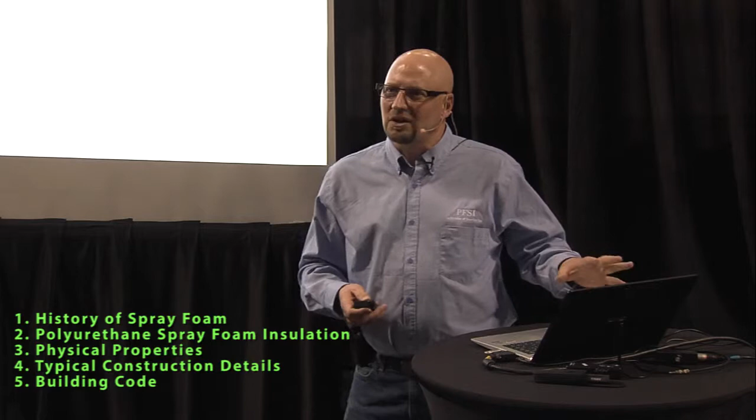We're going to talk about designing an efficient, durable building envelope, basically about spray foam insulation and how it fits within the industry. We'll talk about the history of spray foam, its origins, where it came from, how it came about within the industry. We're going to talk about physical properties, typical building construction details, and a little bit on building code, since there's constantly changes within the code.

The history of spray polyurethane foam: it was first invented in 1939. You guys know Bayer aspirin, everyone's taken a couple on a Sunday morning. Dr. Bayer invented spray foam, first invented in 1939.

The very first use for spray foam in any form of construction was during the war. The Allies would fly over Germany and bomb the runways. The Germans would put foam in the craters, paint it gray, and when the Allies flew over they'd think they'd completely missed their targets because the runways looked perfect. They weren't serviceable, but they looked good from the air. It was a bit of a deception, and a great tactic—one of the very first uses of spray foam in construction as we know it today.

The very first time spray foam was used in construction was 1968, when it was first adopted into the National Building Code and used within building construction. That's over 46 years that we've seen it in the industry, now accepted and governed by the CAN ULC S705.1, which is the construction manual for spray foam.

There's a couple of different regulations that govern spray foam. We want an envelope design very much like a freezer—we'd like to keep the warm air in our house and the cold out, and in summer we want the opposite. So house construction now has been designed very much like a freezer.

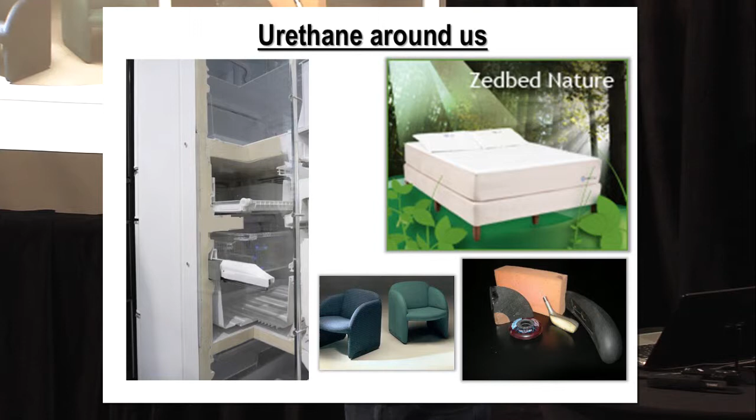We have urethane in everything around us throughout our day-to-day. Those seats you're sitting on have urethane foam in them. We see it in golf clubs—the heads of your golf club are filled with an injected urethane foam to weight and balance them. Car parts, dashes, 90% of our car interior is urethane foam. All the different types of beds on the market are a form of urethane foam, to different degrees. So we see that in our everyday life.

We're going to talk a little bit about foam and construction—sprayed applied foam and injected foams. Spray applied foam is exactly what it says: you have a spray gun and they spray the foam into the building cavity or wall assembly. Injected foams are injected, as we'd see in steel core doors, garage doors, some of the newer polyurethane window frames, and some aluminum frames. So that's where you see all that.

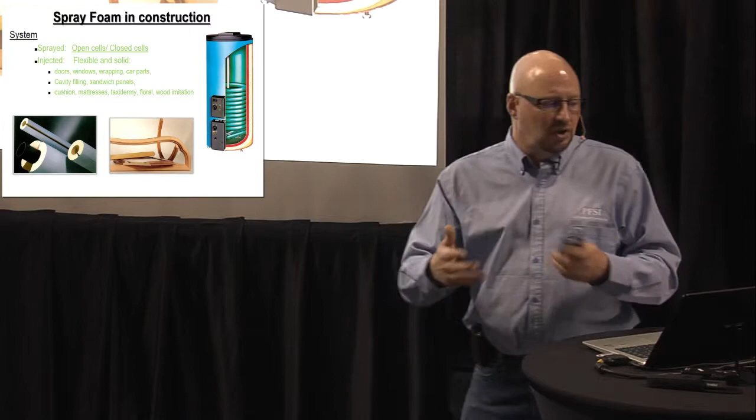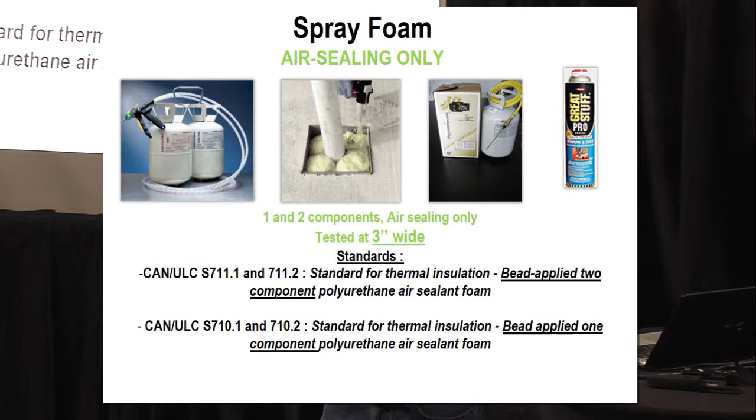Foam for air sealing only—we've all gone to Home Depot, bought a can of that great stuff you spray around windows and doors. That's an air seal, not an insulation; it's for air sealing around windows and doors. They're governed under the CAN ULC S711.2, so there's rules that govern how that foam is used. They can be a two-part component or a single component—single component is just a spray can.

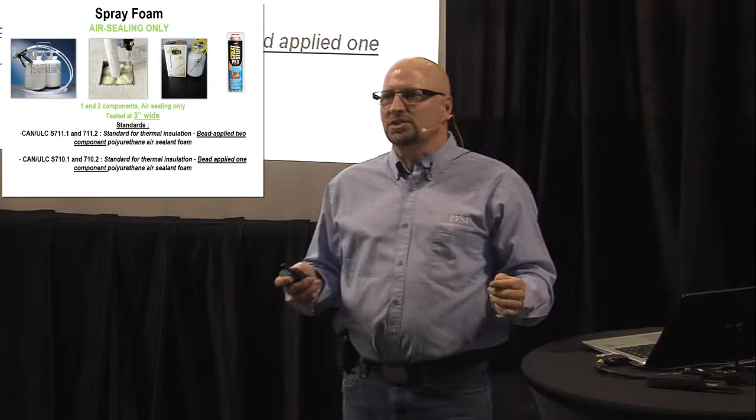You would spray it, it would rise, and you'd fill in around your window. A two-part would be like the propane cylinders you see there, A and B, mixed and sprayed around the windows. That would be more what a contractor would use. Again, they're only for a bead applied around windows and doors. They're not an insulation, they're an air seal. It's just to keep them separated, because people always say, well, I'm going to insulate around my windows. Well, you're not really insulating, you're stopping air seal.

So one of the foams on the market today is a low density foam. Low density foam would be considered a half-pound foam, or low density is exactly what it is. So it's very porous, it's soft to the touch, you can touch it. A very low R value, 3.8 per inch would be the R value of this spray foam. So it's got a lower R value.

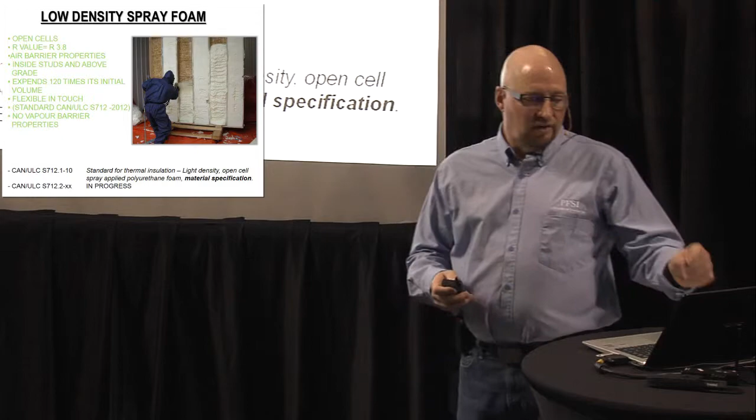The foam can only be used in a wall cavity, indoors and above grade. So it's not for outdoor use, it's not for below grade, is how it was designed to be used. It expands 120 times in the cavity, so they would spray it in, it would fill the cavity, and they just cut off any extra. Again, our 3.8 per inch is governed by the CAN/ULC-S712, the same as the air seals. They fall under the same categories.

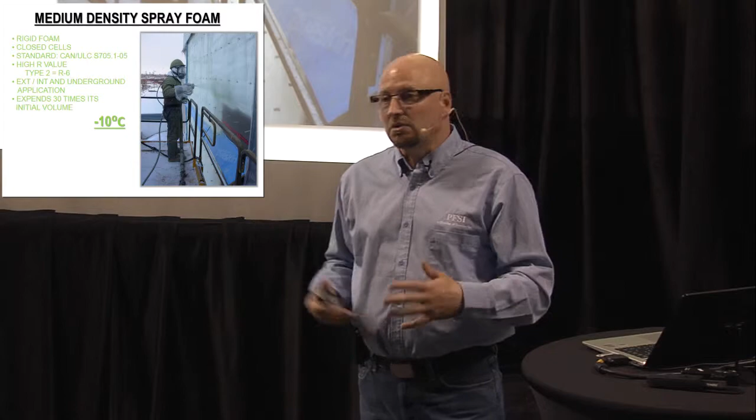Then we'll talk about medium density spray foam, or 2-pound foam as you would hear it. Medium density foam is a 2-component foam, an A and B mixed together. It's rigid with closed cells. Now it has one of the highest R values in the industry, an R6 per inch. So for every inch of foam, R6. It's rigid, it fills the cavity, makes for a great insulation. Expands 30 times its volume, and it can be sprayed at temperatures between -10 and +40. So in the climate of Canada, it makes it very usable within the industry.

High density spray foam would be a 3-pound or better. So we see 3-pound foams used in industrial applications, industrial roofing. We'll see 5-pound foams used in different applications. And in the oil field, we'll see 10-pound foam used for pillow blocking for oil pipes. So there's quite a wide variety of poundages in foams, and they all fit within a scale, from residential, commercial, industrial. So we see that throughout everything - roofing, water tanks, water storage systems.

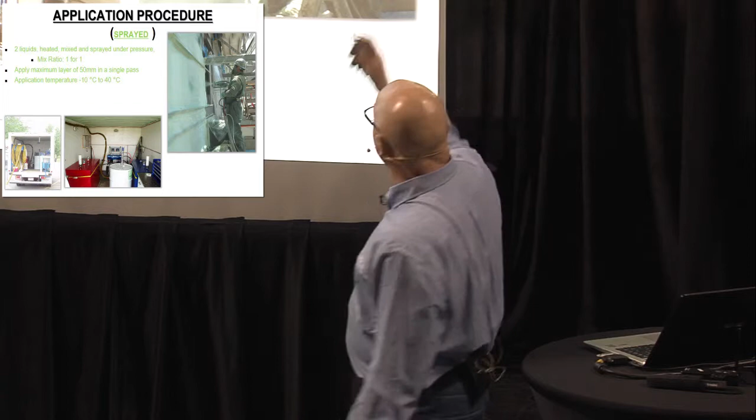Application procedure: spray foam is exactly what it says, spray applied. It's 2 components, an A and a B. They're mixed at a gun through a reactor proportioner, and then it's sprayed on. They have to have specific temperatures to apply it, so maximum thickness is 50 millimeters that they would apply, and temperature application again between -10 and +40. On the right-hand side of your screen, this would be an applicator applying spray foam to a building, and the center picture would be the inside of one of their spray rigs. So very portable, easy to use.

Some of the added values to spray foam that we see in the industry with our product is renewable products. We use soybeans to help cut down on use of petroleum products. We have recycled content, so 18% post-consumption and post-industrial - a lot of plastic bottles are used in recycling with our products, and there's some water added into that as well. So we minimize our carbon footprint by making it as green as possible within the industry. We are the only spray foam made in Canada that uses 18% recycled content. So, a Canadian product with recycled content.

Product standards - what makes spray foam a type 1 or a type 2? I'm sure some of you guys have heard that - oh, it's a type 2 spray foam, it's a type 1 spray foam. Well, there's only one type 2 spray foam on the market currently, and that's Polar Foam 7300, made by Demilec and PFSI. So it's a 2-pound foam. To become a type 1 spray foam, you would have to meet 13 physical properties laid out by the NRC, the National Research Council of Canada. They have 13 physical properties that you would have to meet - that's what makes you a type 1 spray foam. When you exceed all 13 physical properties, you become a type 2 spray foam. So Polar Foam is the only type 2 on the market because it exceeds all of the ratings, and it has the highest R value in the industry.

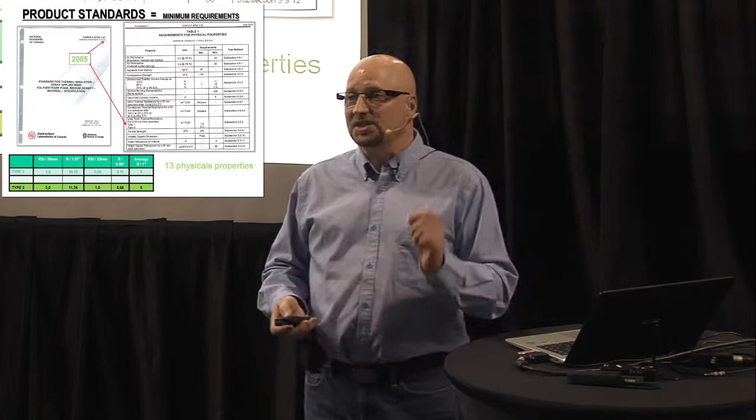The application standards: the National Standard of Canada has CAN/ULC S705.2, which governs how spray foam is applied and installed. The governing body that looks after spray foam is called CUFCA, the Canadian Urethane Foam Contractors Association.

Contractors need to be licensed and registered through CUFCA. They go through an extensive training program, become an apprentice, and then they spray the foam at that point.

A certified medium density closed cell spray foam installer would have a badge like you see here, an ID card with his photograph, telling you when he was certified and what he's certified to spray, whether it's medium density spray foam or half pound spray foam.

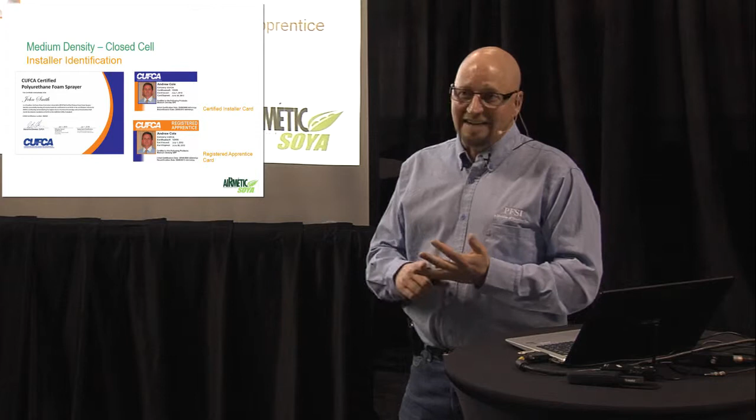As a homeowner, you'd want to ask: are you a certified spray foamer? If he says yes, ask to see his identification - are you CUFCA certified? If he says no, I probably wouldn't use him as a contractor, because that means he's using maybe uncertified foam that's not regulated in Canada. So you'd want to ensure certification.

That's one of the nice things about CUFCA - they do training back east. They're trained extensively, taught building science, the science of the building, how the building is managed. So for medium density closed cell, they do job site documentation.

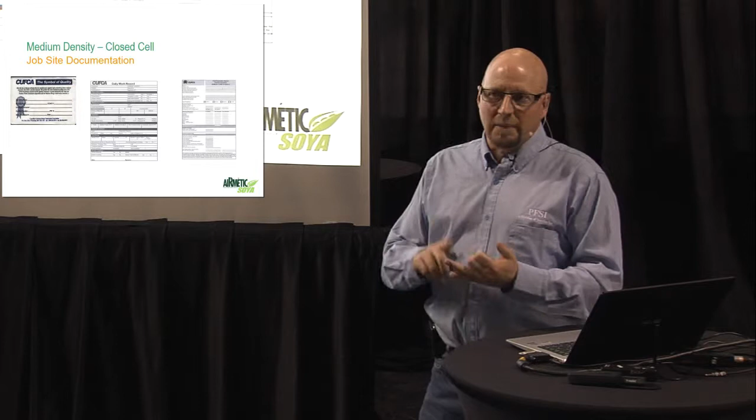On one side of the screen would be a symbol of quality - they stick this on your electrical panel. That would be the CCMC number, the Canadian Construction Materials Centre number for the product, the batch numbers, when it was sprayed, who sprayed it, and their license number.

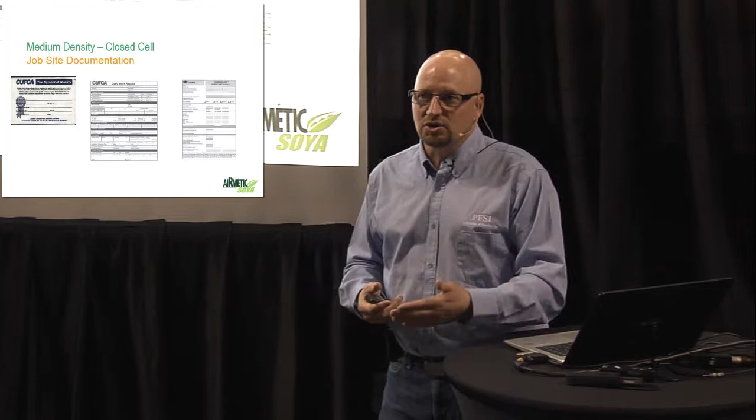So in the future, when you go to sell your home, that adds value. They'll say, yes, it was spray foam insulated by a certified installer - they can always look at that. All the documents are registered with CUFCA.

They would fill in a daily worksheet, marking down the batch numbers, what the ambient air temperature was, what the substrate temperatures were, when they sprayed it, how it performed, and what R value they were achieving. That's all documented and forwarded to CUFCA and kept on file.

So at any time, if you buy a home and it has a CUFCA symbol on it, you can go to CUFCA and say, I purchased this home, here's the installer, could you tell me a little bit of information about it? It validates it and gives you greater value in your home.

And then we have the CUFCA worksheet on the other side. All of our products are manufactured on site - they're an A and a B component, so the contractor in fact becomes a manufacturer. So he would spray about 3 feet, and then test the product to make sure it's performing in the manner it was meant to be performing.

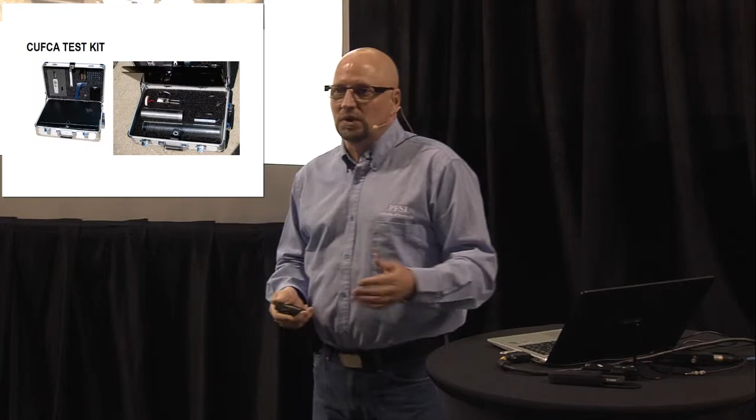He would have a test kit, checking the density of the foam to ensure he's meeting the standards. He would check the adhesion and cohesion to make sure it's sticking to itself and the substrate, and that it's doing what it's designed to do. That's all documented on those worksheets, done usually at the start of the job and at the end of the job to ensure quality assurance.

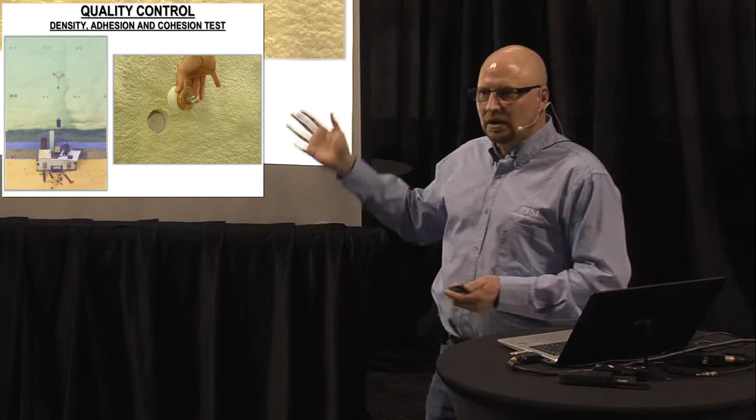In one photo, they've got a weight hanging off the foam, checking the adhesion and cohesion - the product has to stick and be able to hold a 2 kilogram weight. If it pulls off the wall or substrate, it's not adhering correctly, and they would stop and figure out why. That way you get the best quality because it's tested right on site by the contractors, trained specifically for this, whereas an uncertified installer probably wouldn't be doing this type of testing.

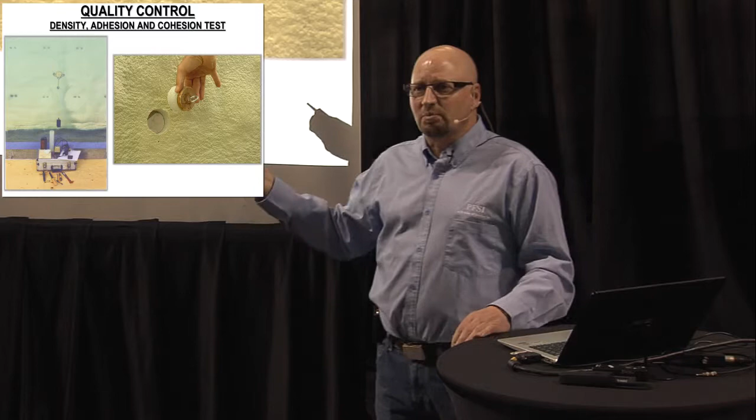And thickness control - so if you've asked the contractor for 3 inches, they would do thickness control as they're spraying, constantly testing it in a grid to ensure you're meeting that standard. So you wouldn't be getting ripped off, so to speak - you know that you asked for 3 inches and you've received 3 inches.

So, properties and functions within the building. As an insulation, it's a type 2 insulation, which is the highest level, and you can achieve an R6 per inch with a type 2 insulation.

As an air barrier, at 25 millimeters, 1 inch, it's 500 times greater than what the National Building Code requires as an air barrier. And as a vapor barrier, it has less than 60 nanograms of perm rating at 38 millimeters, so it acts as a vapor barrier. So you have a vapor barrier, an air barrier, and an insulation all in one. There's no need to have a vapor barrier over the product, so you create a nice seal with that product.

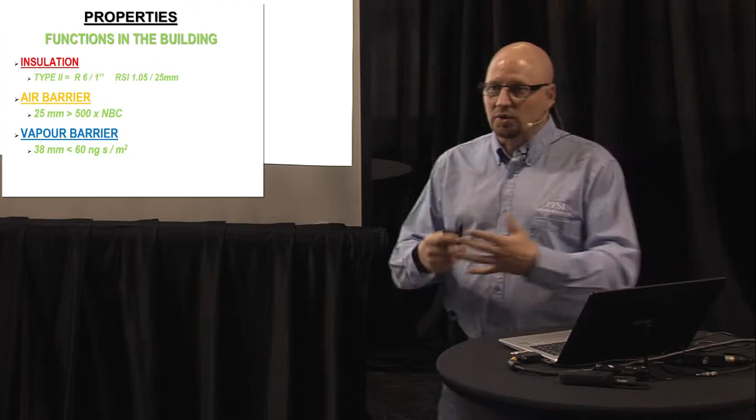Insulation properties: we can see a type 2 insulation. Initially when it's sprayed, it's 7.2 per inch when you first spray it. After 180 days, it becomes R6.6.

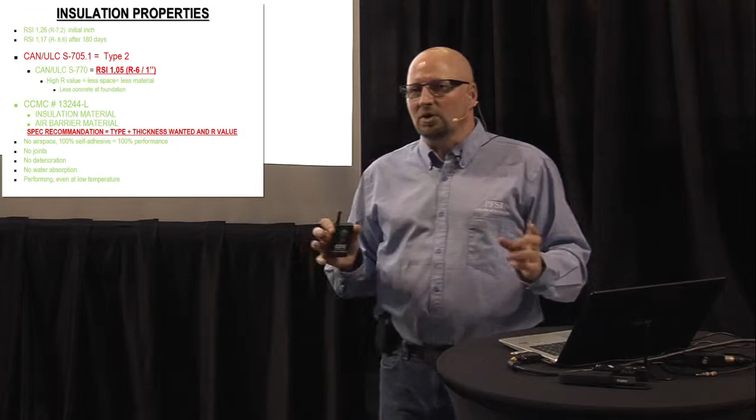But what we're looking for, and because I do these presentations mainly for building officials, architects, and engineers, what they're looking for is the long-term thermal resistance, the life of the foam over its whole life. So they would be asking, what is the LTTR of spray foam? That's the question you'd want to ask a manufacturer: what is the long-term thermal resistance? Our product is an R6, and that's the true insulating value. They can tell you it's R8, R7, R6.9, doesn't matter. It's the LTTR that's the important number to remember, is what is the R value over the life of the building. R6 is the highest in the industry with polar foam.

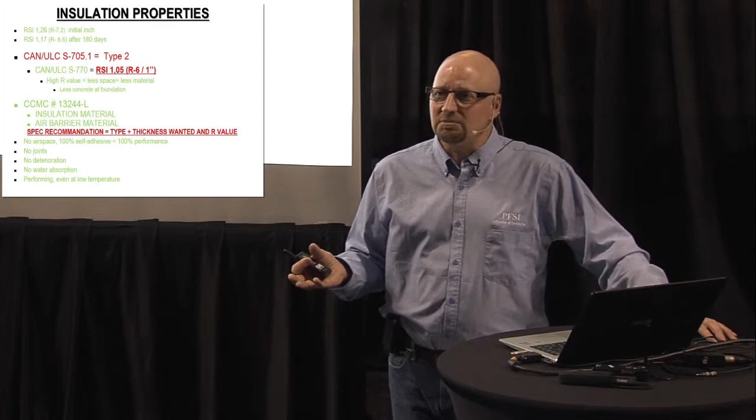And it is a CCMC approved product, so you can see 13244L is our CCMC number. You can go to the National Research Council website at any time, Google it, type in that number, and it will tell you all the specs on that product specifically. So if you happen to have a competitor who says, oh, we're certified, ask them for their CCMC number, put it in there, and you can do direct comparisons to the product.

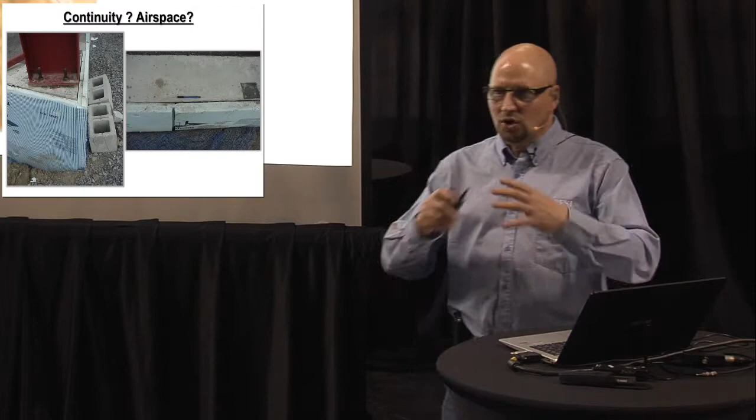Air barrier properties: the National Building Code 2005, parts 5 and 9, require an air barrier system. Gypsum board acts as an air barrier at 0.02. Spray foam is at 0.00004, which is 500 times greater than what the National Building Code requires. So as an air barrier, it's a great product, you can't beat it for an air barrier system. It's self-adhesive, it's rigid, it's structural, it seals every joint in your house so you don't have any air leakage.

Air movement versus air barrier: what causes air movement in your home? Well, you get wind effects, so you have wind on one side creating high pressure, and low pressure on the other side, causing air leakage. You have chimney effect, just the air stacking up inside. Combustion and ventilation, we have fans, vents, light plug holes. Air is always leaking out of a building. With this product, you become an air barrier system, eliminating all of that leakage, and of course you maintain your heat.

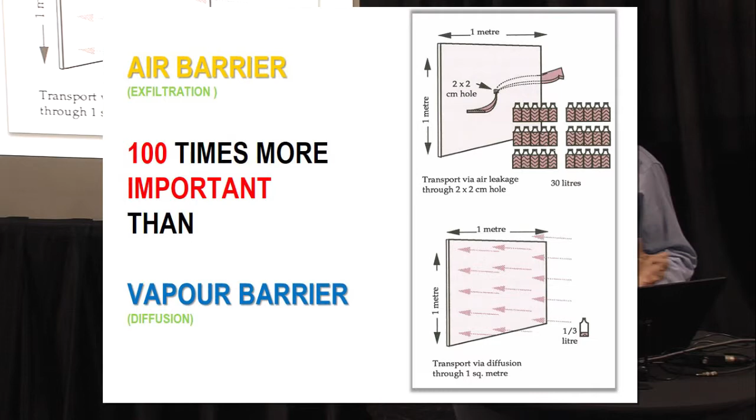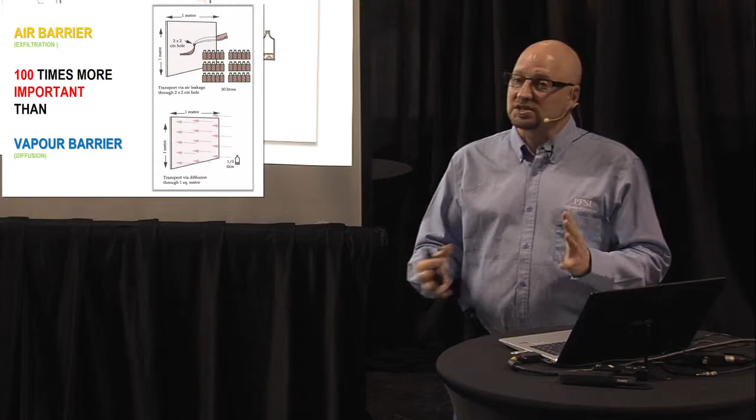An air barrier is 100 times more important than a vapor barrier. A vapor barrier might allow a third of a liter in through diffusion, but if you had a vapor barrier and punched a 2 x 2 cm hole in it, you could allow 30 liters of moisture into your home through that hole. So you want to stop air transfer, not necessarily the vapor. The air barrier is the key.

So everyone's familiar with the leaky condos in Vancouver, the EIFS systems they used. It was a big catastrophe. Every building was leaking, we had mold and all those problems.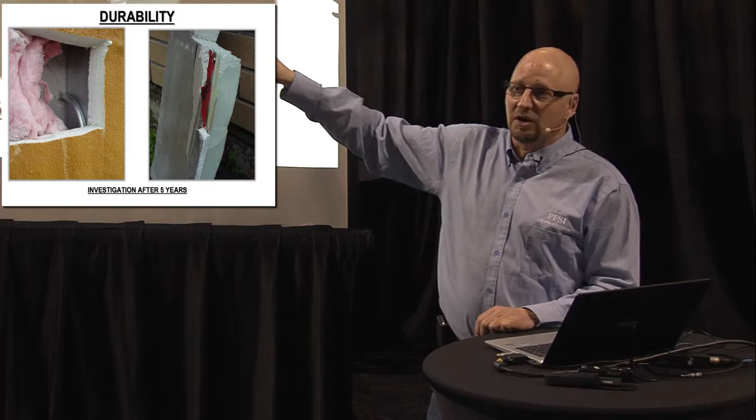Durability. This is a school in Alberta that was spray foamed 5 years ago, and we went back and left an area that we could go and investigate after time. We can see here, the pink fiberglass is as pink as the day it went in. We can see a conduit going through the wall into the school that was never taped up, which would have been a potential air leakage point. But it didn't leak because the exterior of the building was spray foamed and sealed, so there was no air leakage. So you can't get any dirt within the voids, and you have no transfer. That insulation actually does the correct job on the interior walls when spray foamed on the exterior. And that's a commercial application.

Just to point out, our product is GREENGUARD certified for schools and hospitals, and that's the highest standard. California set the standard extremely high, and we are the only product that can meet that standard to be used in children's schools and hospitals.

So the product performs well, provides great results. We can see all of the air leakage points in a house. With spray foam, these areas don't leak. On the other side, your rim joists, your sills, your joints, through the siding, the insulation, electrical outlets, pot lights - these were all potential leakage points for air to get into your home and for hot air to get out. When you spray foam, you create seals around these, eliminating those potential leak points in your home, creating better energy efficiency. So you could save 30 to 60% on your heating bills by insulating with spray foam.

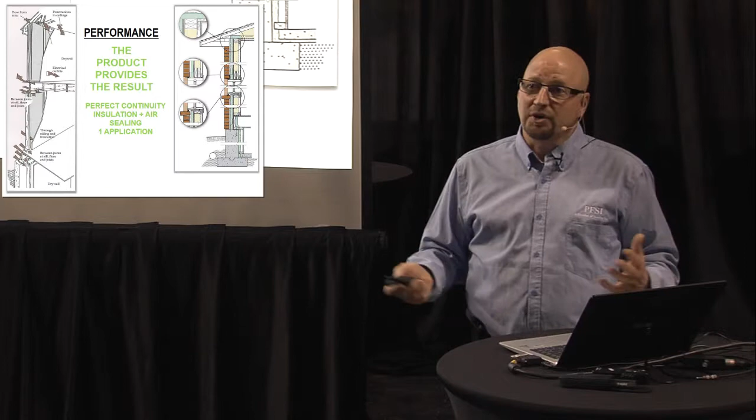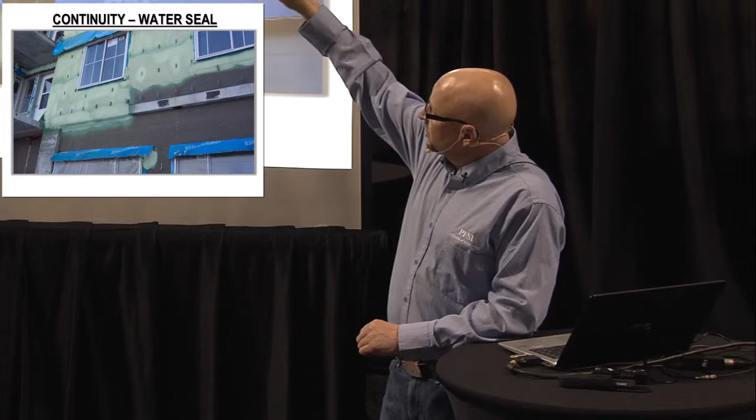Continuity and a water seal. This is a commercial application - we don't see this on homes that much, mostly back east we'll see it, and I'll show you a slide of that later. This building is spray foamed on the exterior, and we can see it goes right over the flashings, and it's spray foamed underneath the flashings to create a perfect water seal. So water can't penetrate that building. The foam is 100% waterproof, so it doesn't allow for that.

Some of the system features: well, membranes can be installed at -10 to +40, so can spray foam. You can spray it over flexible flashing, Z-bar, copper pipes, PEX pipes, ABS - it doesn't matter what type of pipes. It can be sprayed in all types of thicknesses, and it's supported by many other types of products like DensGlass and OSB, so it can be sprayed on a variety of things. The only thing it won't stick to is poly - they poly the windows because you don't want spray foam to stick to it. But spray foam sticks to absolutely everything. It's got great adhesion properties and great insulation properties.

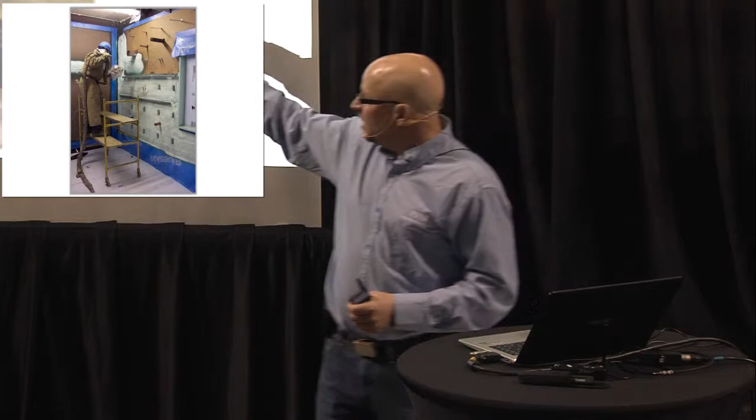As an air barrier system, our wall assemblies have to be tested by the National Research Council of Canada. They set up false walls, put in all types of protrusions, different types of blue skins, flashings, brick ties, Z-girts, pipes, and then bring the temperature down to our tested level of -10. They're showing it there at -9, then they bring it right down to -10. Then they have an applicator go in and spray foam it to see how the product performs around these protrusions, and they pressurize that wall to see if there is leakage. That's how they determine our ratings through the National Research Council of Canada, and then they give us our CCMC number for approval for construction in the industry.

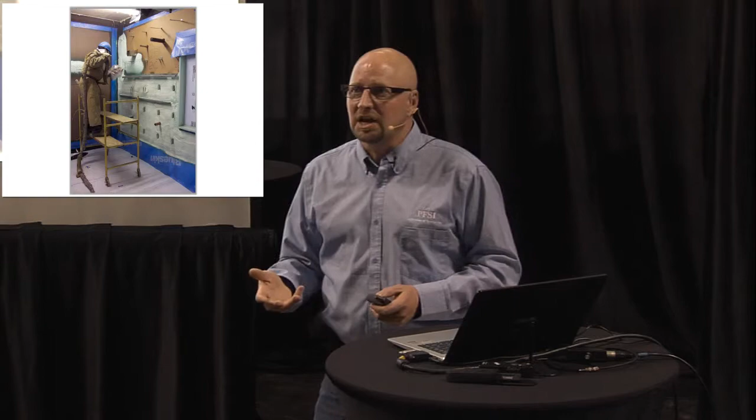Wind and rain, well, we live in a tropical rainforest in British Columbia, so we're considered extreme weather here, even though we don't get snow, but we have lots of extreme weather. The interior of Canada is pretty much sheltered, the coastline a little bit moderate, but basically the East Coast and West Coast are considered extreme, and that's one of the advantages of using spray foam in these areas.

So water absorption. The ASTM D2842 water absorption test immerses products in water for 96 hours and then pulls them out to see how much water they absorb. Spray foam absorbed 0.8%. So basically they put it in for 96 hours, pull it out, shake it off - that's all the water it absorbed.

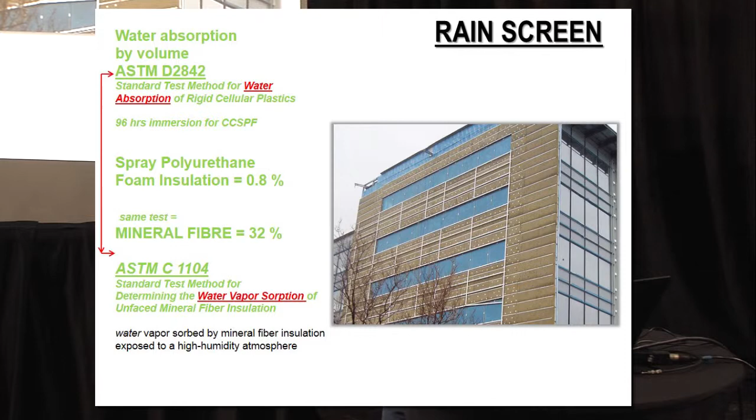Mineral wool, they put it in for 96 hours: 32% water retention. That's a lot of moisture to be in your walls. You think if you have a leak and that goes in, how do you get rid of it? It's almost impossible. So 32% absorption on other products.

We can see here on this building that was done in mineral wool fiber, these dark areas are water that's laying inside the hat track. So when they come and put cladding on that building, they have to wait for it to completely dry out before they can clad it. This is why we had problems with leaky condos. Moisture gets trapped inside, you can't get rid of it, unfortunately.

As a vapor barrier, National Building Code states a vapor barrier is when it has a permeance of 60 nanograms of perm or less. So a 2x4 stud is at 46 nanograms of perm, and our product is at 38 nanograms of perm when applied correctly.

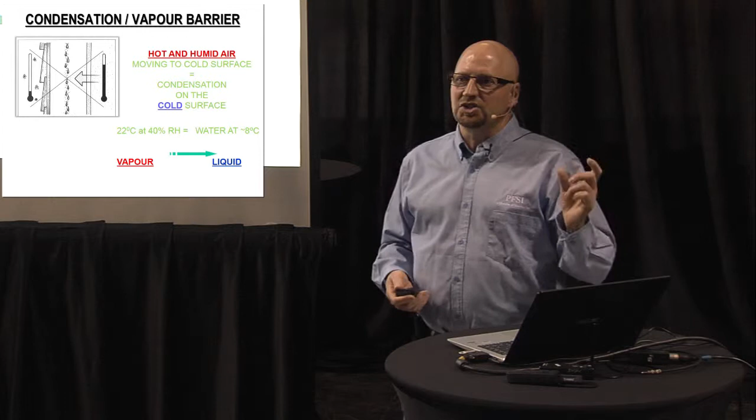So condensation versus a vapor barrier. Hot, humid air wants to move to a cold surface, and then it creates condensation. You eliminate the potential for a dew point when you spray 2 inches of foam in a wall. It cannot form a dew point and have condensation happen. That's one of the beauties, again, of spray foam.

So functions within the building: insulation, air barrier, and vapor barrier. It's a great performing product - one product, 3 functions, gives you energy savings, cash in your pocket. If I could save 30 to 60% on my heating bill for the rest of the life of my home, of course I would insulate with it.

It would make sense. Chances are you're going to want to change the carpeting in your house in maybe 10 to 15 years. You might renovate a kitchen in 20 years. You're never going to tear out the drywall and re-insulate. So why not do it right the first time? Insulate your home correctly, save the money over the life of the building.

Some of the other properties of spray foam: it's resistant to moisture, oil, solvents. It's inert, doesn't create or absorb any odors. So it doesn't off-gas, it doesn't create odors, it doesn't absorb odors. It's very inert, it's stable. It's a green solution, doesn't support any fungal growth.

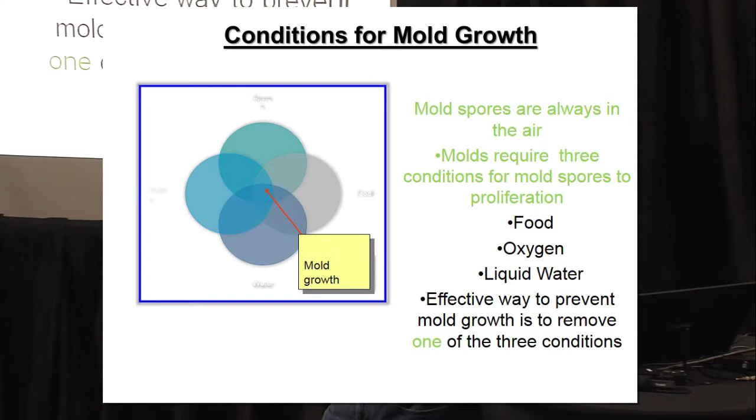So for mold to grow, what do you need? Well, you need food, water, and oxygen. So you eliminate one of those, you've eliminated the potential for mold growth. Spray foam doesn't support fungal growth - it's a polyurethane plastic, so mold can't grow on it. You're never going to have a mold problem in your walls when you use spray foam. That's one of the great features of using it - you eliminate the potential for mold growth in your home.

So no waste, no packaging. They come in returnable totes or 45-gallon drums. So 2 totes, like a set, it's called a set, can do 2 houses. So our carbon footprint is quite minimal compared to all the others when you look at it overall.

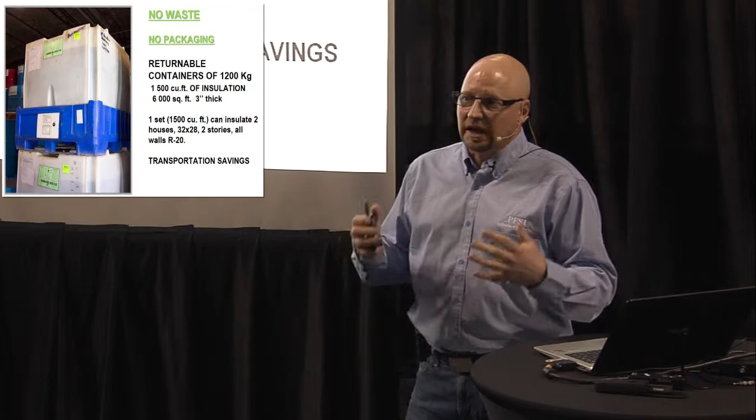And if we start to look at things globally and how we help the environment, yes, we're a petroleum-based product, but we're as green as we can make it. We use recycled plastics, we have some soy product in there, we're using some water content. And our global footprint is minimized, so our carbon footprint is reduced.

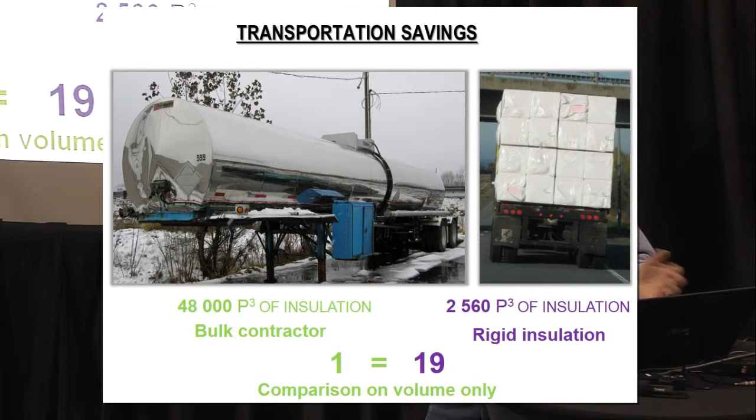So a great transportation cost. One truckload of our product would take 19 truckloads of rigid board to equal the same amount in comparison. Now think about that on a big, huge construction site, what the carbon footprint now becomes for extruded versus spray foam. So again, in the big commercial jobs, it minimizes our carbon footprint.

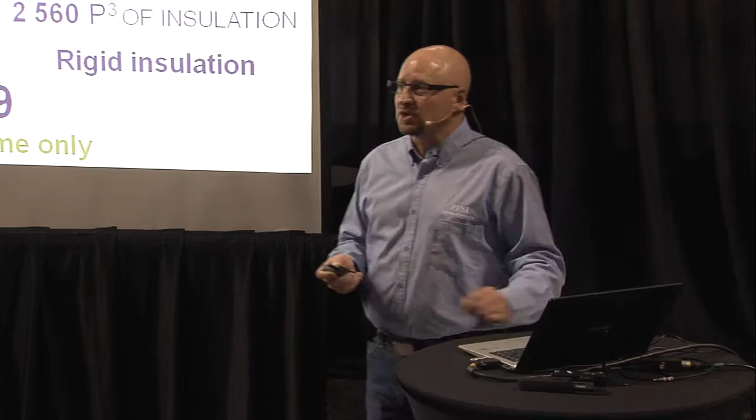So certification program, we are GREENGUARD certified. I said that earlier - for schools and hospitals, we are the only product that's GREENGUARD certified.

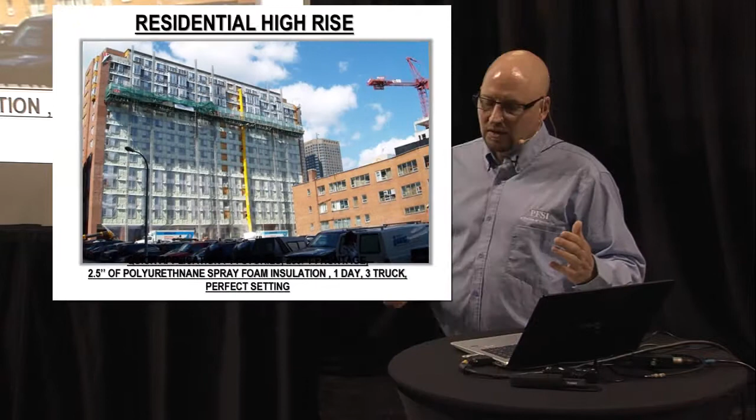Residential high rises. The speed of a construction job is very important sometimes on the site. This whole building was done in one day with 3 trucks, using mason's jacks. They were able to come in with 3 trucks, one day, and spray foam the whole building, which really sped up the job site.

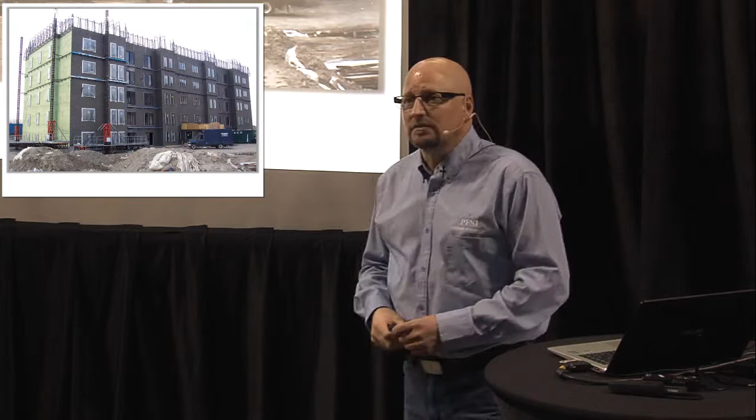They were falling behind and time constraints were happening, so they went to spray foam, which eliminated some of their costs. Again, we can see in this shot they're using the mason jacks. That side of the building was done in about half a day with just 2 guys. So it really does speed up the process in construction.

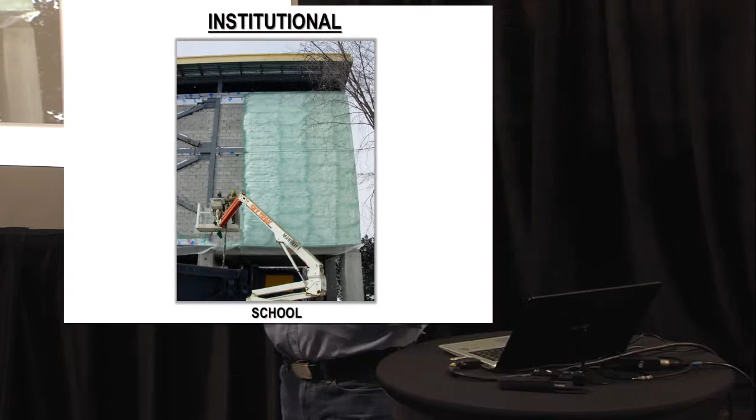Institutional, so schools. The number one user of spray foam in schools is Alberta. They spray foam almost 90% of their schools, which is great to see. We're starting to see schools being done, drugstores, London Drugs now is doing it, and Target and Walmart are starting to go, hey, we need to save money on our energy costs, because how do you heat these huge buildings? The costs are astronomical.

By using spray foam, they're starting to minimize their costs and conserve energy. They see it on their end, and hopefully they pass the savings on to us. We know Walmart's always dropping their prices, so it must be because of the spray foam. All the energy savings, they want to pass that right back to us, which I appreciate them doing.

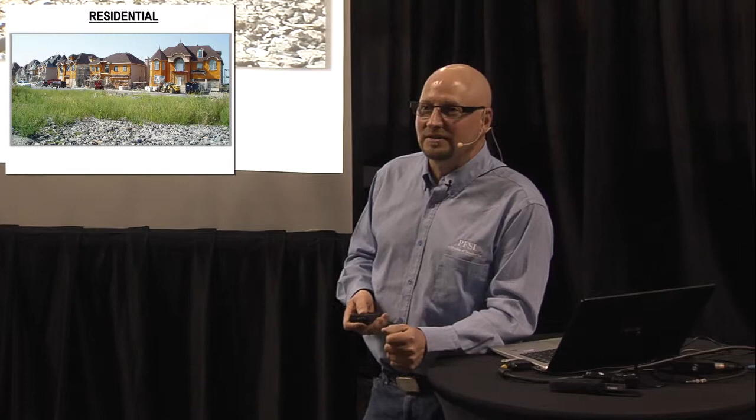Residential. The number one user of spray foam in Canada is Quebec. 98% of all homes built in Quebec use spray foam insulation. Mind you, our parent company, Demilec, is in Montreal, so we're a Canadian company, and Quebecers tend to use Canadian-based products. They're the number one user of Canadian-based products in Canada. I wish the rest of Canada would be that way, we'd be doing great business then.

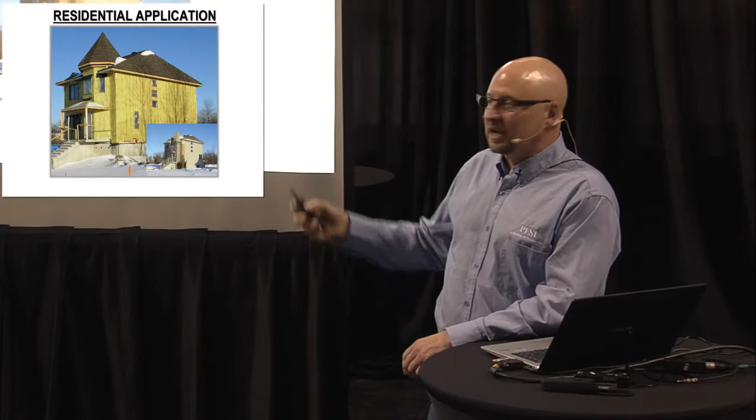But they do spray foam all of their homes, inside and outside. As we can see here, the exterior of this home is spray foam, and it's also spray foamed on the inside, so they do strapping, because they have quite an extreme climate in the area. As we see, Northern Ontario and Quebec are very extreme.

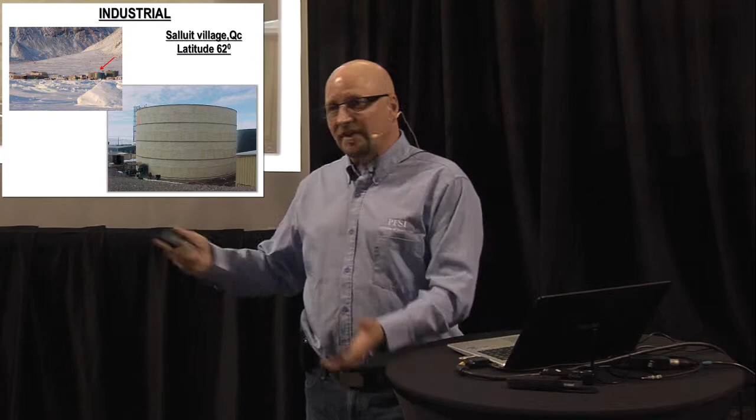Salluit Village, Quebec, latitude 62, very northern - everything in that whole village is spray foam: their water storage tanks, all of their buildings, everything's spray foam. It's one of the furthest northern areas, just about next to Ellesmere Island, where we have a radar tech station the military has up there. They fly the product in with Hercules aircraft, and they spray foam everything because it can sustain the temperatures up there.

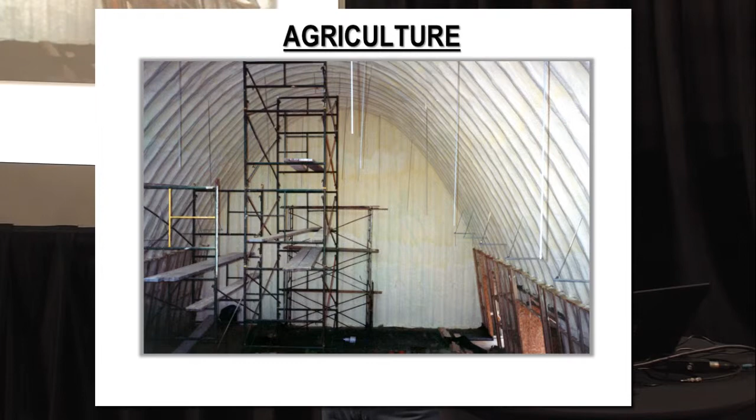Agriculture. Alberta is the number one user of spray foam in agriculture. The Potato Growers Association of Alberta recommends that all their potato storage facilities be spray foam, because it doesn't support mold growth, making for safer potatoes. The Lay's Potato Chip Factory out by Taber, Alberta has a huge storage facility, all spray foamed, and again, it doesn't support mold.

A gentleman asked me the other day, he said, we're looking to store fruits and vegetables, what would you recommend? I said I'd recommend spray foam because it doesn't support mold growth. So you want to make sure your root cellars are spray foamed, in case there's a tornado and you need to get to the root cellar. Just kidding.

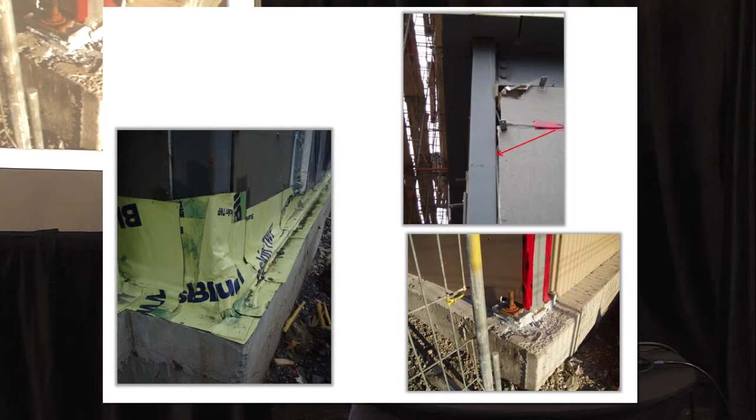So these are some of the applications we see within the industry. Who installs pink fiberglass insulation on the job site? Usually the lowest man on the totem pole, right? The least qualified person is doing the most important job on your home. I find that amazing. Same with Blueskin.

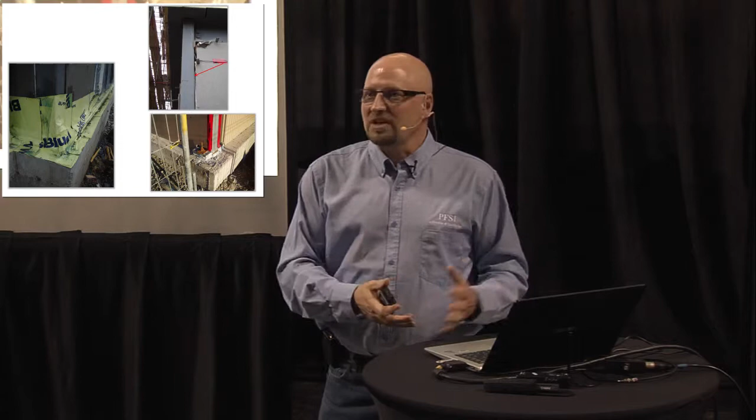That's the most important detail on a big construction job site, and they have the lowest guy and the cheapest labor they can find to install them. So this is an improper job that would just be torn off. We want to seal up these areas with foam because it's a very difficult detail to air seal, and spray foam can completely seal that. When you get your home insulated, are they splitting the batts, putting them in there, making sure they're just right? Often they just stuff them in the wall and leave.

With spray foam, our contractors have to be certified and regulated by standards to ensure you get the best insulation in the industry. Why would you want the worst person installing the most important product in your home? It doesn't make sense to me. I want the most qualified person to do it. You wouldn't get the laborer kid to do your electrical or plumbing, right? You want a certified guy because those are important parts of your home. That's why we put a lot of time into training and education.

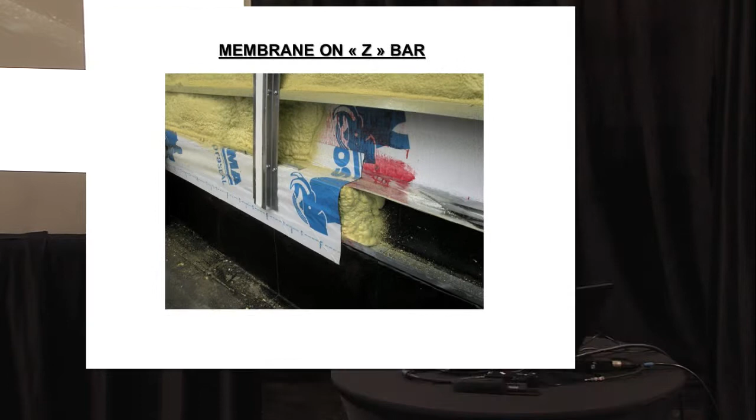This is a commercial membrane over Z-bar, and you can see how spray foam creates this great seal. The membrane goes down, there's spray foam underneath, and they seal right over top of it, so there's never going to be water leakage at these details. This is an architectural detail I mainly discuss with architects. We do a lot of through-wall flashings that are very specific, and spray foam was really the only answer in these big commercial buildings for doing them properly. We're just starting to get into the residential aspect, and it's becoming more mainstream.

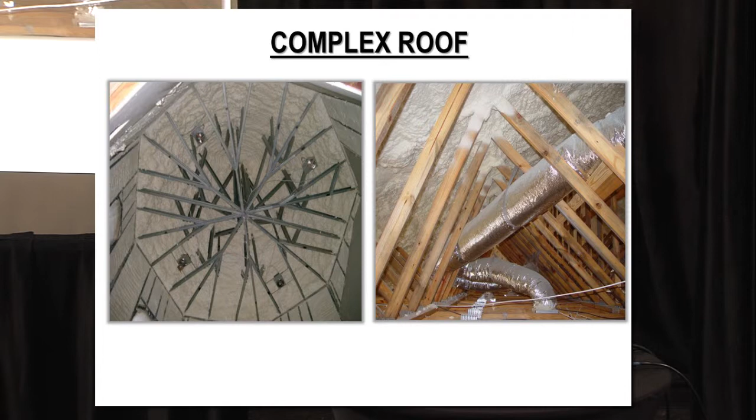Complex roof designs - spray foam is really the answer for any roof design, in my opinion. How would you ever insulate that with batts and seal it up? It'd be almost impossible, a detail that would be hard to do. We can see here in the vaulted part of this ceiling, very easy to do. A lot of people are now placing their HVACs into the attics, insulating them there, making some changes. This here would be cardboard baffles for ventilation. They spray foam directly to it, creating ventilated ceiling space that's well insulated - a great detail to have.

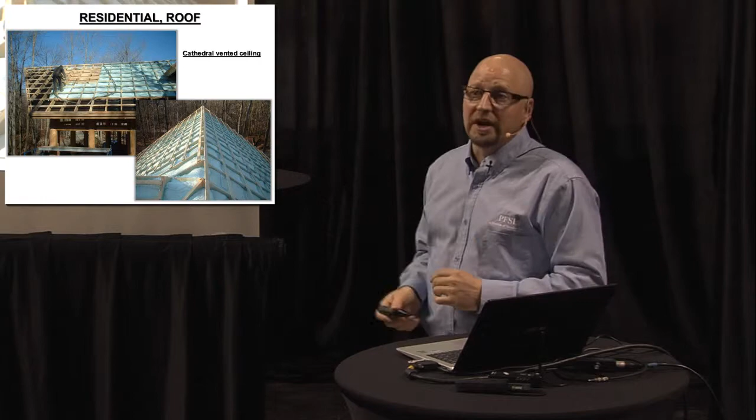This is a residential cathedral ceiling done from the outside. They do all of their woodwork on the inside, spray foam from the outside, creating ventilation, and then the strapping and sheathing goes on over top. It's kind of done in reverse, but it's the right way to do it. It makes sense to create ventilation in there.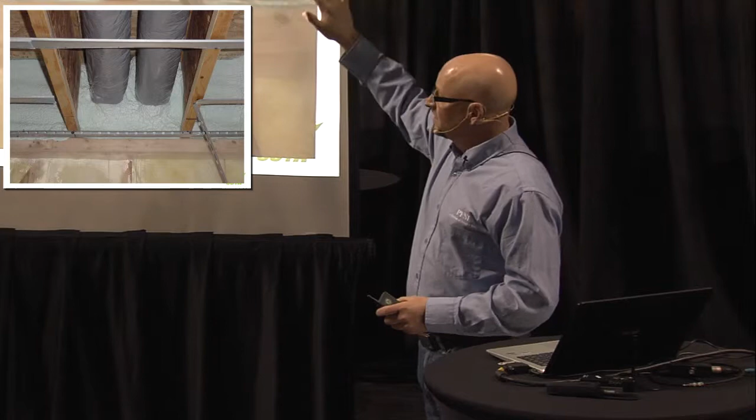Rim joists in your home - how many people have cold floors at the edge of their house, in their crawl space? It's because of their rim joists. How do you seal that up? When you think about putting a batt into that void and then having to poly over it and seal it, that's a very difficult detail, whereas spray foam fills those voids, does a really nice clean job, and eliminates air leakage around the rim joists and crawl spaces. As we can see here, the rim joists are all completely done, all the walls are done.

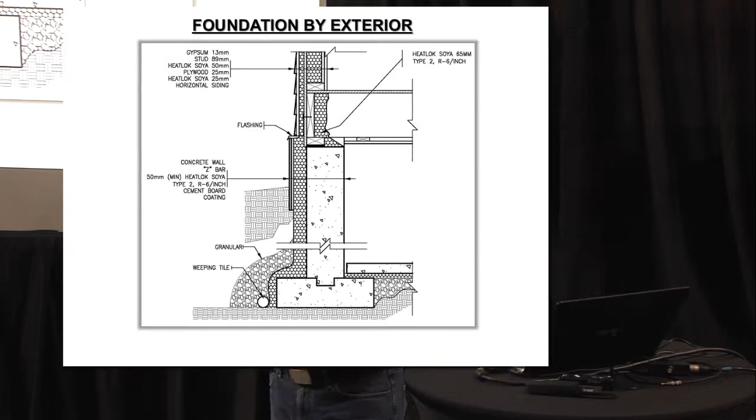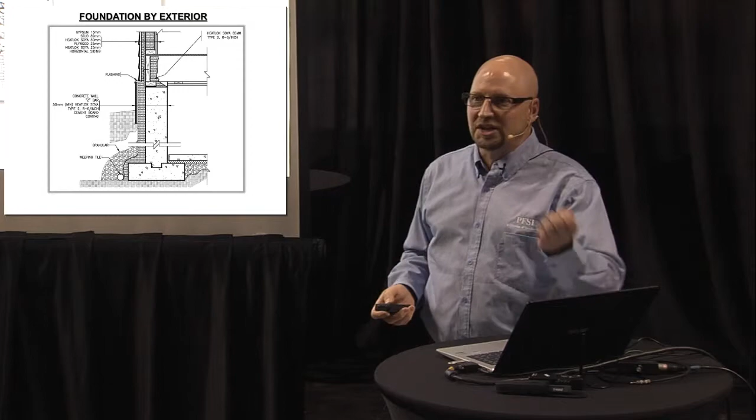As a drainage plane, foundation by exterior - spray foam can be used on the exterior, above grade, below grade, inside, outside, on the ground directly. Spray foam can be used in all applications, a 2-pound exterior or a 1/2 pound indoors only. Again, make sure you know what the product is. They spray that on the exterior wall as a drainage plane and then put in your weeping tile and gravel. No need to put tar and pitch on the side of a foundation anymore.

This is common back east, although we just had a house in Victoria. This is called a rubble style foundation, where it's all rock. There's a lot of water penetration in these style foundations if you don't have great drainage, and they're very difficult to seal. So back east we see all of these done in spray foam to seal them up and stop the water penetration going in, and then they put in new perimeter drains and seal them back up. We just did one here in the city of Victoria.

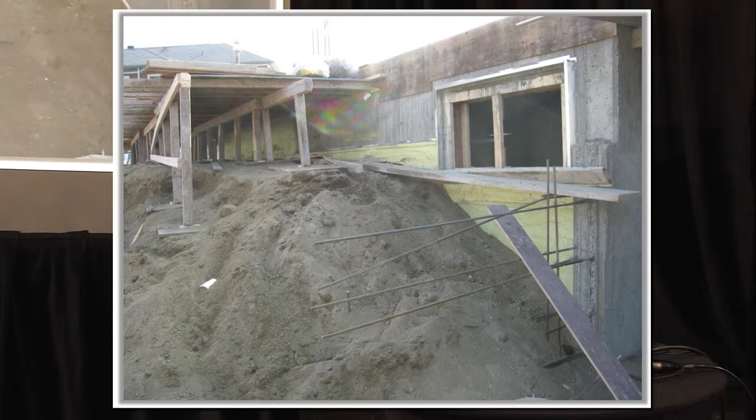Here we see a foundation, spray foamed. The nice thing about spray foam, once they're done, you can backfill directly to it, immediately - he could literally spray foam a wall, go around the corner, and they can backfill to it. Spray foam is dry to the touch within 3 seconds; you put your hand directly to it, it's dry.

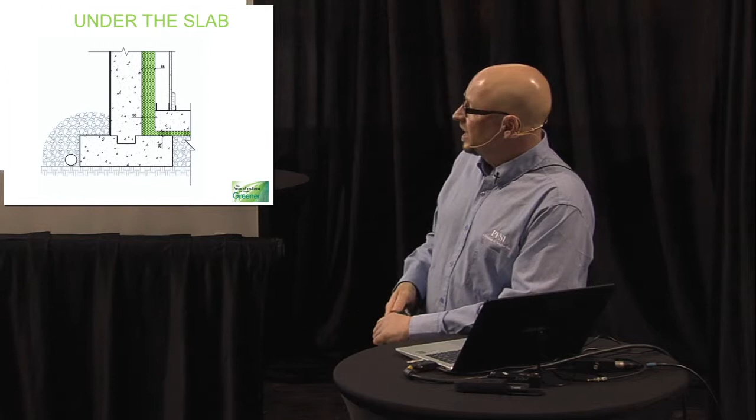Under the slab - this is becoming a more common practice. We're seeing it more in the interior of British Columbia now for radon control. Everyone's familiar with radon gas. The Okanagan Valley is mandated to have ventilation under their slabs, with fans and pipes to capture the radon gas so it doesn't end up in your foundation area or basement.

So what they've now done is spray foam under the slab, right to the ground. They pour their concrete, and then it's carried up the wall, and then they stud the walls and just carry it right up. This completely seals the foundation and creates a very cozy basement atmosphere. This would be a new construction application only.

So here we have on one side, spraying directly to the ground. We recommend a minimum 1.5 inch spray directly to the ground. It seals around all protrusions completely. You can put boxes around areas that need to be done. Perfect continuity, radon control. It has a rating of 28 psi, so you could literally drive a truck over it if you had to - it's not going to compress down and squish. Very high psi rating on our foam.

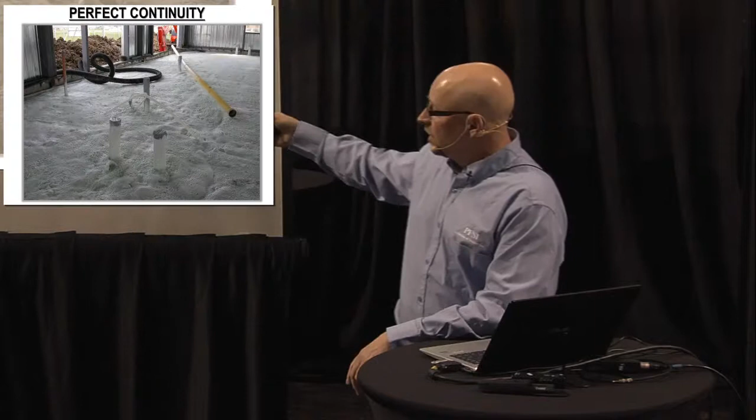And again, if you were doing radiant in-floor heating, you could spray foam directly to the ground, lay your heating pipes, and then pour concrete over it. Again, a very efficient way to do it. You don't have the problem with laying down rigid panels - walking on them, they crack, they break, you have to tape all the joints, then put poly down to make sure it's sealed up. It's very labor intensive. This makes for very quick application, speeds up construction, and minimizes costing again.

And it's just another application. You can see he's carried it up the wall slightly, so when they pour the concrete and stud the walls in the future, they can tie it right in when they spray foam it at a later date.

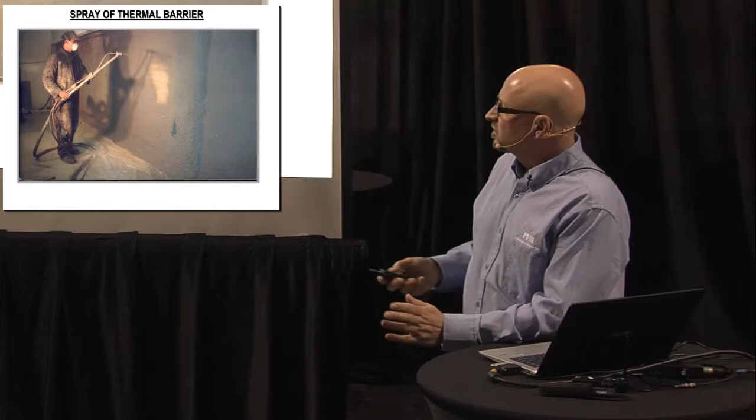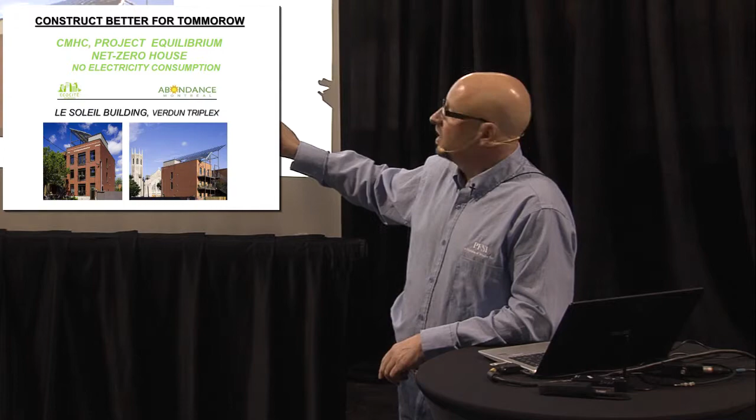This is a great project - this was the Verdun triplex in Montreal. It's a net zero energy building, so they don't use any electricity in this building; it's all solar and passive. We spray foamed this complete building, and then we did thermal imaging on it, and it's quite dramatic when you see it on this next slide.

So there's the thermal image of our building, and we can clearly see the window frames is where your heat loss is - those bright white areas are the aluminum in the window frames. They're high energy efficient windows, yet you see the heat loss coming right through the aluminum part of the frame. But look at the building just behind it - you see the bright areas, the heat loss of that building, and the one on the far side, that's heat loss of that building too.

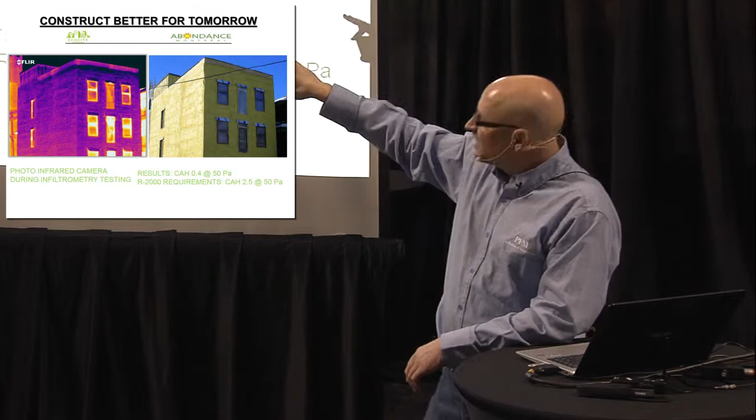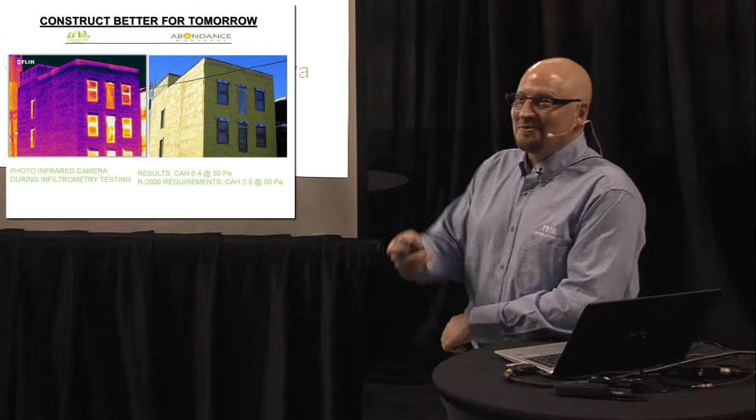So we can see how well the insulation works on this building. It's completely sealed - there's no bright spots other than a little bit in the glass. If that had been a wood frame window instead of aluminum, you might have minimized that heat loss, but that's still a very minimal amount compared to the building behind it that's glowing orange. I find that to be a very dramatic shot - I love looking at it and thinking, wow, I wish my house would be that energy efficient, which it is because it's spray foam. Everybody's thinking the same thing - I need energy efficiency like that. That would be some great savings in that building.

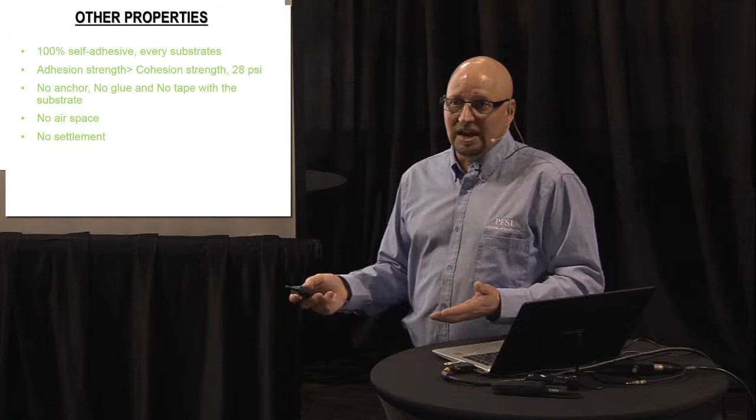So it's 100% self-adhesive on every substrate, with 28 psi adhesion cohesion strength - no anchors, no glue, it sticks to all substrates. There's no airspace, it doesn't settle over time, it doesn't fade. It's a great product when you look at it for the long term. If you're building a new house, you want to live in that house for 30 years and be able to pass it on to your next generation.

You know you're going to have energy savings forever in that home. Applications include residential, commercial, industrial, agricultural, and others.

Well, how many people have been to the Calgary Zoo? Anybody been there? You know the dinosaur park and all the rock formations they have? That's wire mesh with spray foam over it, and then they sprayed gunite on it to make it look like rock. That's how they make those big formations. It's used in a lot of different areas that people wouldn't think they'd ever see it. They go, wow, I would have never thought the zoo would have foam.

A lot of those exhibit places where the monkeys are and other areas, that's all spray foam covered with a polymer over top. And that's it. Thank you. Anybody have any questions they'd like to ask about spray foam?

Everyone's being shy, no one wants to ask. Yeah, oh, he'll bring you a microphone.

The first question you mentioned was about whether there's a difference in insurance. That I don't know, I've never inquired, but it's something I could probably look into.

Yeah, because you mentioned if you have that certification which they require for children's schools and hospitals, Green Guard certified. You were mentioning where the certified guy comes in, what's that about? Oh, the certification just says that it is sprayed and it's guaranteed. CUFCA offers third-party warranty on the spray foam. We as a manufacturer offer warranty on the spray foam, and then the installer who installs it, the contractor, also offers warranty. So essentially you have 3 warranties on one product. CUFCA does a $50,000 warranty on the product.